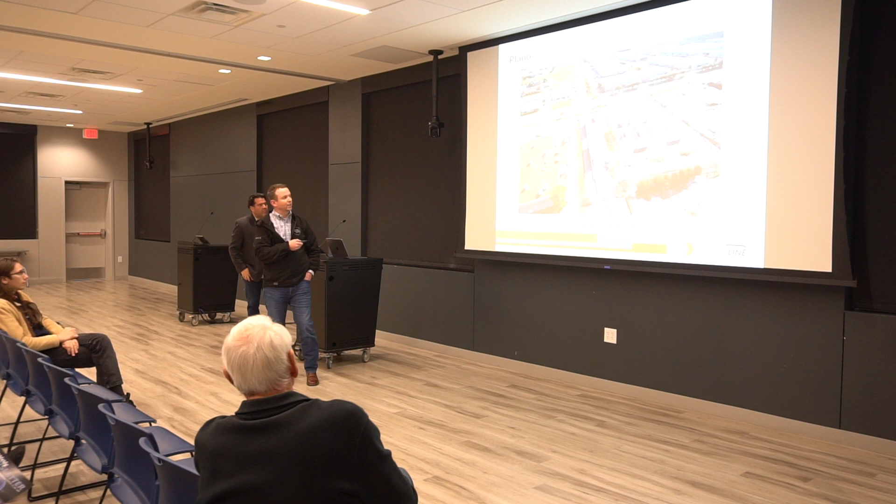No, okay, John, ask a question. We'll do it when we get there. Sure. I'm about to ask a question about.

Here's a little bit better shot of the Shiloh station. You can see some of the amenities, the trash cans, the benches we've installed, the column cladding, and the neat architecture. We have wind screens in between the columns, light bars, and all the lighting. Some of the last things we have to follow up with are testing the cameras and the speaker systems that have been installed at the station. So just a lot of cleanup, a little bit of punch list at this station.

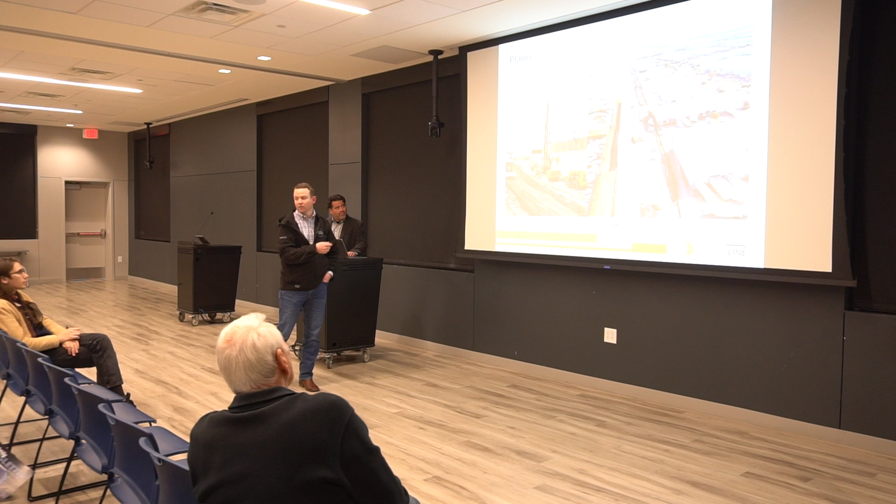Here's a shot, as mentioned earlier, of the EMF construction. To the right, our Shiloh station's right up here, and a lot of this is the excavation for the side rails that the trains will use to pull off into the maintenance facility. This is a better ground shot of the over excavation and the foundations being installed.

I believe this is Jupiter Pedestrian Bridge, part of that early phase 1 for the hike and bike. A handful of bridges were required to be built on the Silver Line phase of the project. This pedestrian bridge jumps all the way over Jupiter Road and ends just on the other side of the post office. It was really key for DART to get those bridges done as construction of the rail was going in, because in the future, once trains are running all the time, it would be much more difficult and drawn out for a contractor to build those structures. So we try to put them in as soon as we can.

This is the 12th Street at-grade station. This station's a little bit different - it's a dual platform, so you have the tracks in the middle and a platform on each side. Most of the station is built out. You can see the canopies finished, the brick pavers, that reddish looking brick. We've primarily focused on the parking lot areas, so we'll have a parking lot on this side as well as this side. If you were to drive by tonight, this building's actually already been demoed, we've already graded this area, and we've started our subgrade preparation. It's a lime stabilized subgrade in that area.

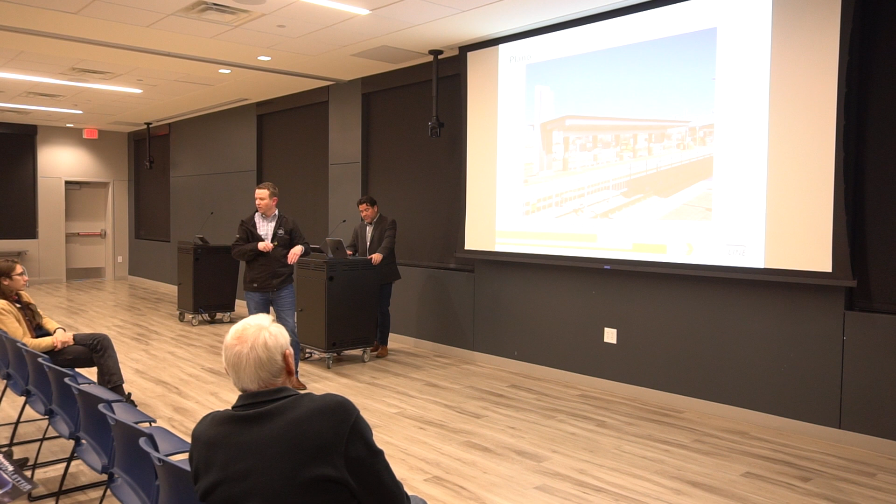This is a before and after progress photo of the aerial station. The one on the left is an older photo. You can see this is actually the Red Line, and we've built bridges and platforms up next to it, on the sides essentially. This is a transfer station, because to the right is the actual at-grade 12th Street station. There's a pathway over to this station, and you can see a skeletonized canopy forming, whereas on the right, the canopy is finished up, and we're now putting the decking and roofing on the left side.

One of the biggest and more complex items of this station is that we have 2 elevators we're installing, so you'll have a redundant system - 2 elevators and 2 sets of stairs from the aerial station. In a month's time, we'll start to set the roof, and as we set that roof, we'll also set the elevator equipment with it. It'll be a traction elevator, so there's a lot of mechanical work going on right now.

Here's a ground shot of that structure I was talking about. For security purposes, it's a glass elevator, so you can see into it essentially. I get that question - why is it glass? Well, it's for security purposes. You can see the glass going in up the structure, and we were working on the actual steps for the staircase here.

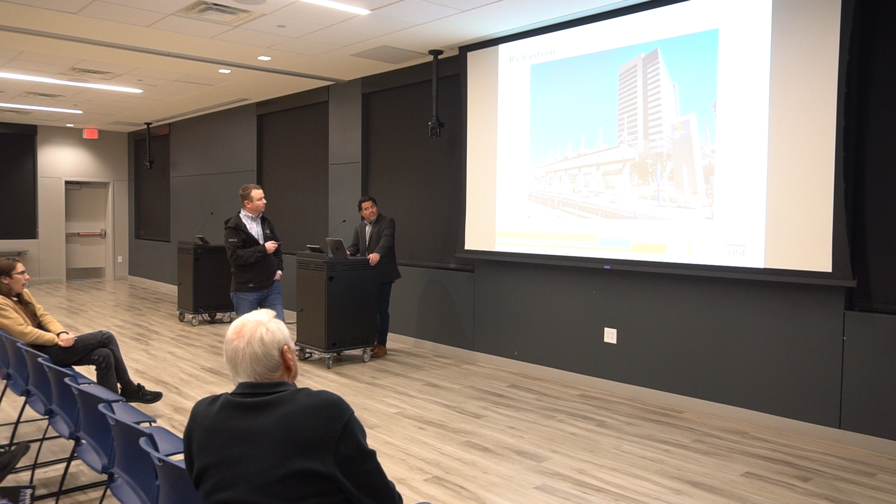So here's a better shot on the ground view. You can kind of see the column cladding. We've got the signage, the gull-wing canopies finished, and then we've got the trackway fence completed as well.

So as far as the Plano area, the rail's basically done, a lot of the crossings are finished. We've tried to push really hard on the station finishes, and that's kind of where we're wrapping up for this section of Plano.

All right, let's start. Yes, sir. Can you talk about the noise control, noise betterment, and the horns, please? Just like what is the...

Sure, I'll go into, this is John Hoppy, who did our FEIS study and our noise analysis. He can go into that.

I'll start off with saying trains are running right now, and I have this in the second part of the presentation, but I'll go ahead and mention it now. As we're testing, quiet zones aren't in effect. Once we are running operations, quiet zones will be in effect, and that means the only time you'll hear the horn is if the engineer who's driving the train sees something on or near the tracks that could impede his progress. So while we're testing, you hear the horn a lot more, because when we're doing testing, we're not just running trains, we're testing everything. We're testing the validity of the track, we're testing the signals, the lights, the arms, the timing mechanisms. So you're constantly hearing that for the safety of the drivers and the pedestrians.

In regards to the walls, take it away, John. We did, per our Federal Transit Administration's standards, an in-depth sound analysis, noise analysis along the entire corridor. The one thing is 95% of all noise impacts that we identified were eliminated by putting in the quiet zones. Most of the noise was associated with the train horn.

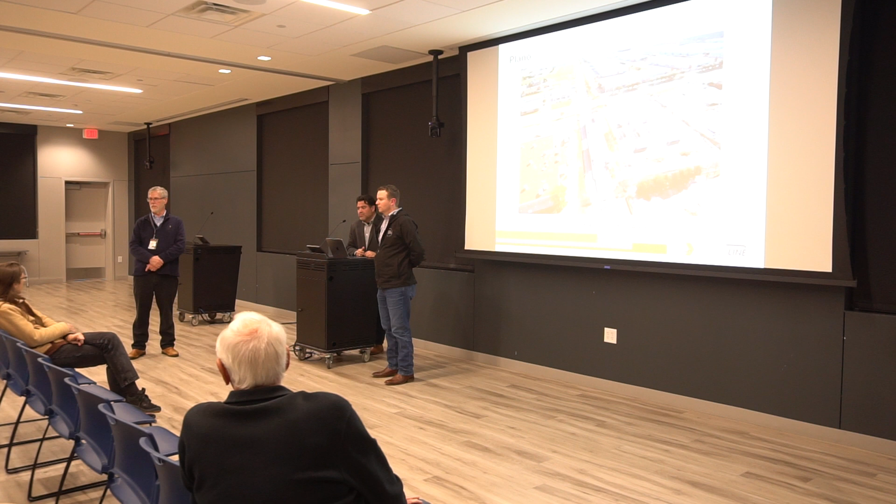Also, in our area, I don't know if other areas have this, but we have the freight train, and that is becoming a nuisance right now. Because you advertise that the DART train is quiet, almost whisper quiet, that's not true with the freight train. And that barrier wall we have between our community blocks off some of the sound, but believe you me, you can hear it.

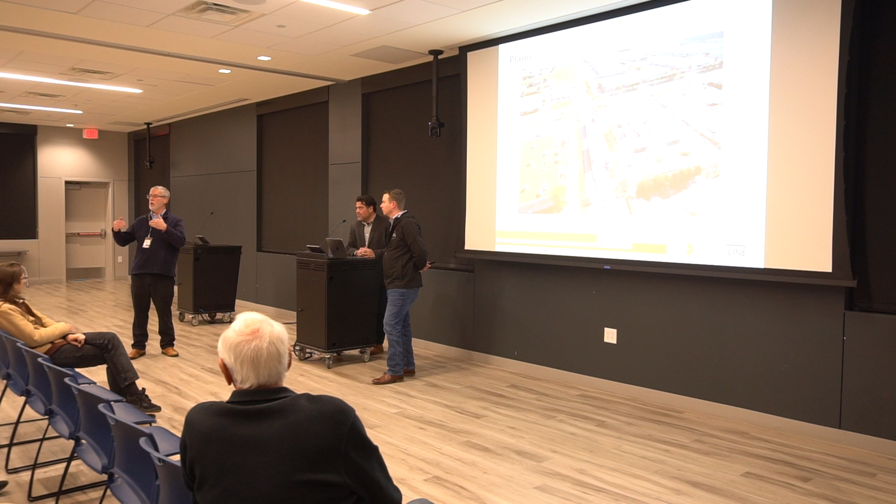Well, we're not responsible for the freight noise, the freight companies are. We are responsible for our noise, and what we're doing to address our noise is also going to address some of the freight noise, such as this all brand new track, brand new crossing that improves it. The quiet zones were there already, but we're going to be using quiet zones.

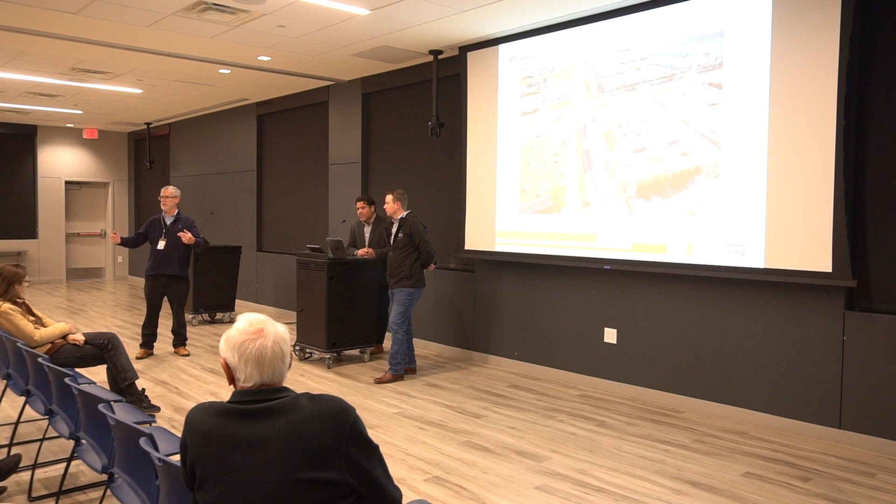The question we have is, our area with our 122 homes, are we one of the rare areas that's gonna have both trains coming right behind us? No, Dallas, city of Dallas won't have that. I don't think in Plano though, it'll veer the way that track's gonna veer for the freight. In Plano, we're the only residential neighborhood adjacent to the track. I know, that's what I'm finding out. But there's other neighborhoods and areas, there's several parts in Carrollton where you have freight and the Silver Line's gonna come through in residential areas.

If they're honking at Cabela's too, at 12:30 at night, really loud. They won't have to use the horn once the quiet zones are re-implemented. We had that before until the construction and all. Our concern is, years ago there was an accident, I think a chemical accident or something with the train behind us.

That concerns us. Will there be a time that the Silver Line and the freight go right through at the same time? No, we control dispatch, so freight and passenger won't ever be running at the same time. And again, the track is going to be all brand new, and we're going to be in charge of maintaining that track, so that will limit the potential for any derailments or any type of issues like that.

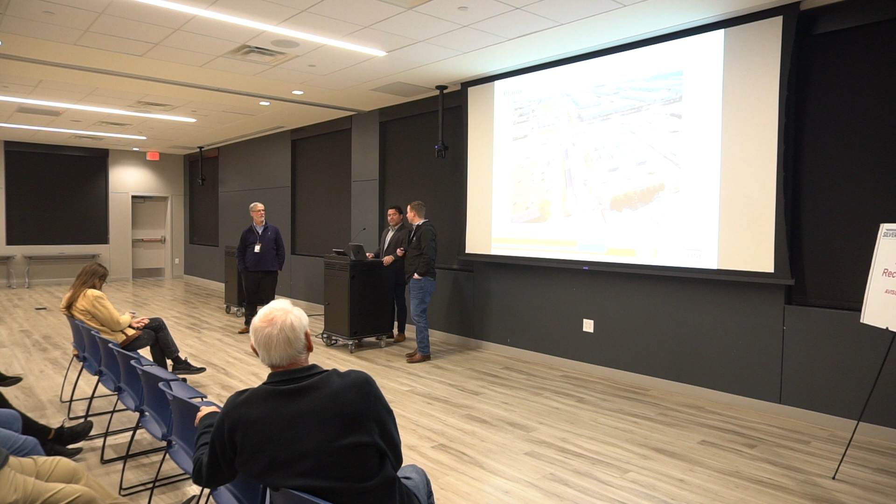My last question was around Shiloh Road, where the electrical facility is - what type, how's that fence coming? Would there be screening on the north side and the west side, or is that fence just on the north side? There's an existing fence where the substation is. We're going to be putting in a fence as part of the urban design program on the east side. On the west side it will just be a cyclone fence, I believe. I think this fence through here is actually already installed - it's a little bit of an old photo. I do know Oncor has an ongoing project to do some sidewalks in that general area, and we did a property swap with Oncor so we could have pedestrian access on both sides. Frank worked on that in 2010, and then on the north side as well.

Yes sir, quick question on the Cotton Belt - I'm not tied into that very deeply, I started taking this project on when you guys started doing the Silver Line. But if the city's in control of Cotton Belt bridges, and the city will determine when those open and/or run, who's responsible for the general maintenance of the Cotton Belt? Not just the bridges - the bridges are a component of the trail, and the city will be responsible for that. We're responsible for the maintenance and security of the rail right of way where the tracks are. So the actual Cotton Belt path and trail is a responsibility of each conglomerate city?

Yes. Are there any, on the trail - I don't know what the lighting arrangement's gonna look like - are there any emergency call boxes, or does everybody just have a cell phone? People are going to do dumb things on bicycles and skating, and I don't know what was decided in Plano.

All the additional trash cans, chairs, lighting, benches, security - that's up to the cities to determine if they're going to expend money to put those elements in there. We just do the hike and bike trail, and they take over from there; whatever they do, that's their responsibility.

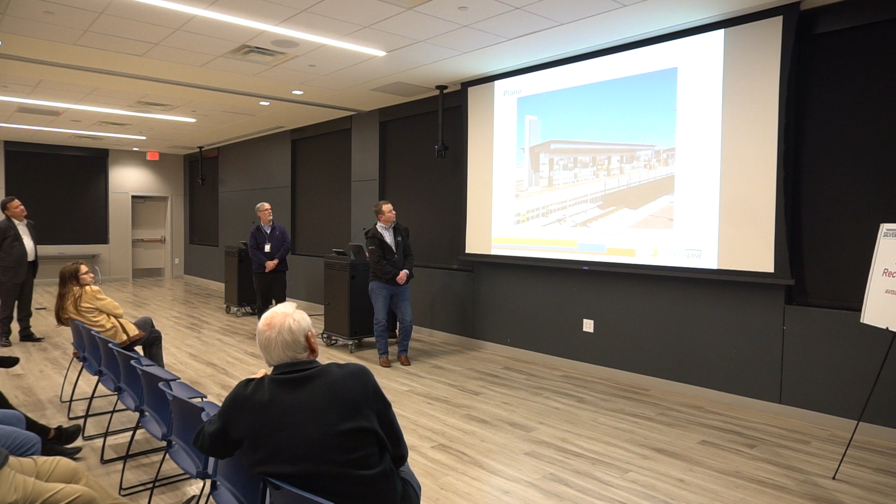I have a specific question on the CityLine station, if you go to that picture. The drainage from the existing DART line, down here, used to go down to the left because there was no tracks - there's a big field down there. Kind of down this way? Yeah, it comes across where the silver line is now.

And we're having an issue with the drainage at that point. It actually comes down, and when there's a downpour or a lot of rain, it goes through our property, on the fence, a little further down from your picture. Is there a dog park down here too? There's a dog park, and I think our employees have gone in there and put bags of concrete along the fence and punched holes in them to stop the water somewhat from coming onto our property. But when it rains a lot, it's like a deluge - there needs to be a better way for that water to drain during a thunderstorm.

So who do I take this issue to? Just email me, and then we can talk about it offline and look at it. I'll give you the info. And we are still under construction, so there may be something planned to address it, but in case it's not - did you have a question, sir?